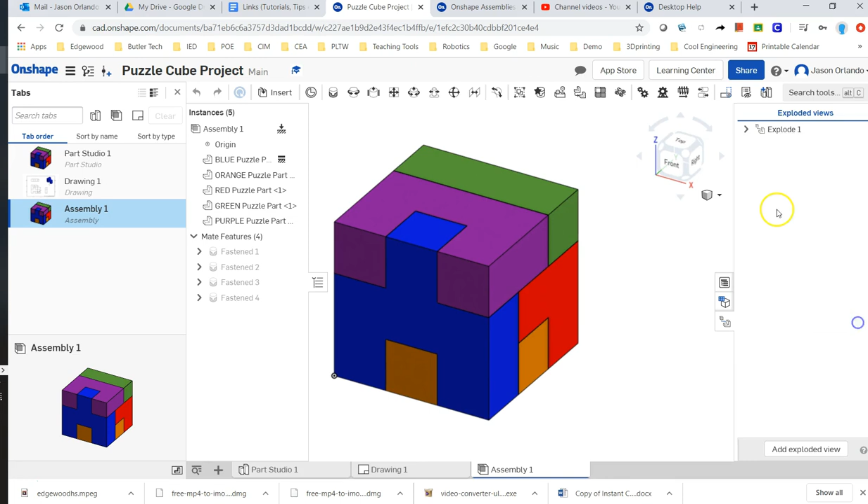Okay, in this video I'm going to show the assembly of the puzzle cube project. I'll mention the mates that are up here, how to insert, and how to get your piece grounded at the origin. We are going to look at how to create an exploded view, which is found over here. And we're going to talk about how to get into your bill of materials and update that, because this is what your parts list is going to become.

Okay, so even though I've already done that here, I'm going to flip back to my demo page and we're going to start right up. So the first thing you got to do is go to the Assembly tab down below. Instead of being in your Part Studio, go to the Assembly. If this little area doesn't show up, this little tab will expand it for you so you can see the pieces and the features you're working on. This is like your browser while you're going through the assembly to see your parts and their relationships.

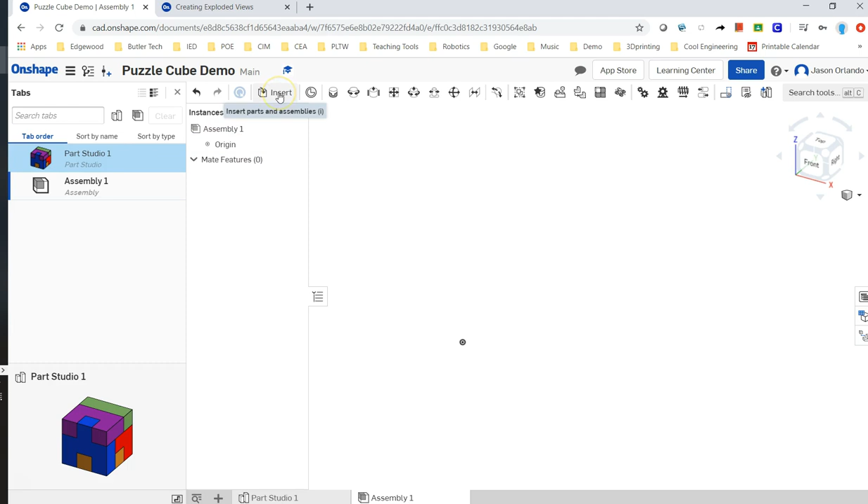So the first thing I'm going to do is insert the part that I want to be grounded. By choosing Insert, I have the option to bring in parts from my Part Studios or assemblies, and so I do have these tabs here. I can even go to other documents, but I'm going to stay within the current document and inside my Part Studio. And I'm going to bring in the blue part.

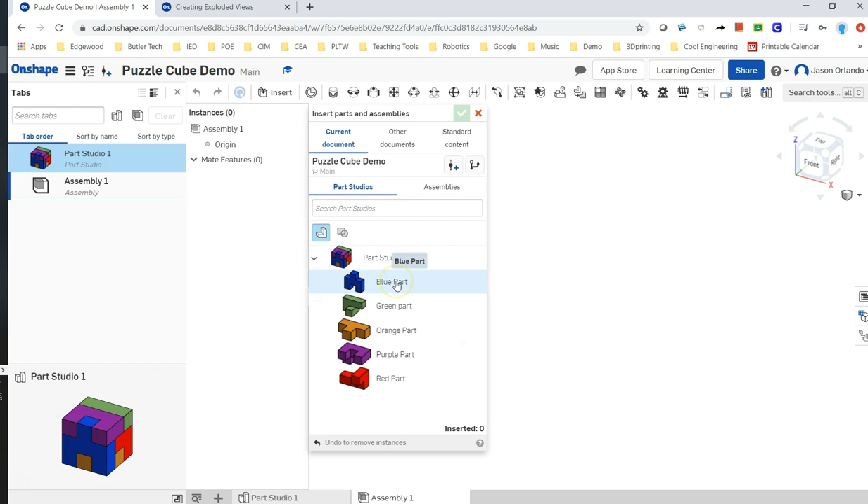So I select it here, and once I've selected it, there's a difference between left clicking in the graphic window and choosing the green check mark. For your very first piece, clicking the green check mark is ideal because it's going to come in the current orientation and it should be attached to the origin. Now it's not grounded or fixed, it can still be moved, so the best thing is to right click on it right away and then choose Fix.

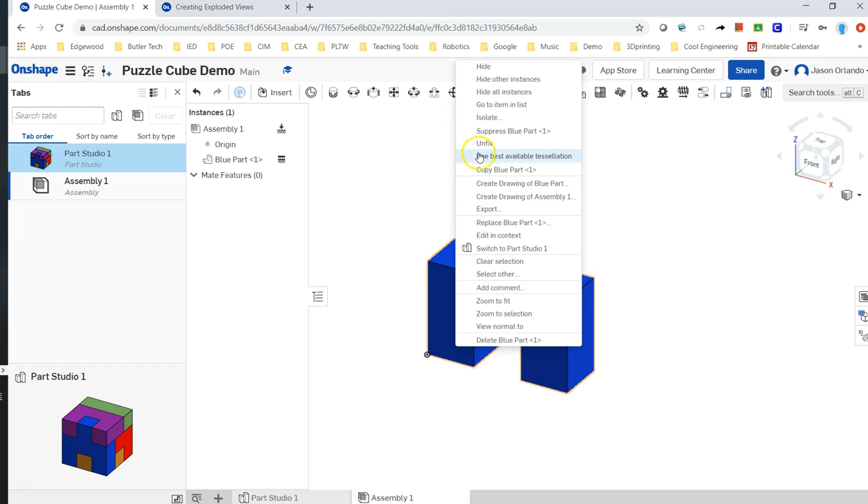So now if I try to left click and drag this object around, it is not movable in space. I'm going to right click on it though and choose Unfix, and show you briefly how to take a part that you didn't lock to the origin and how to get it there. So first, even though I can click and hold and drag, another thing you can notice is that if you just do a single left click, you'll bring up this triad where you have your three axes and you can translate the part and move it around in space. The other thing you can do is grab the center of that and latch it onto a different geometry of the part, like that corner.

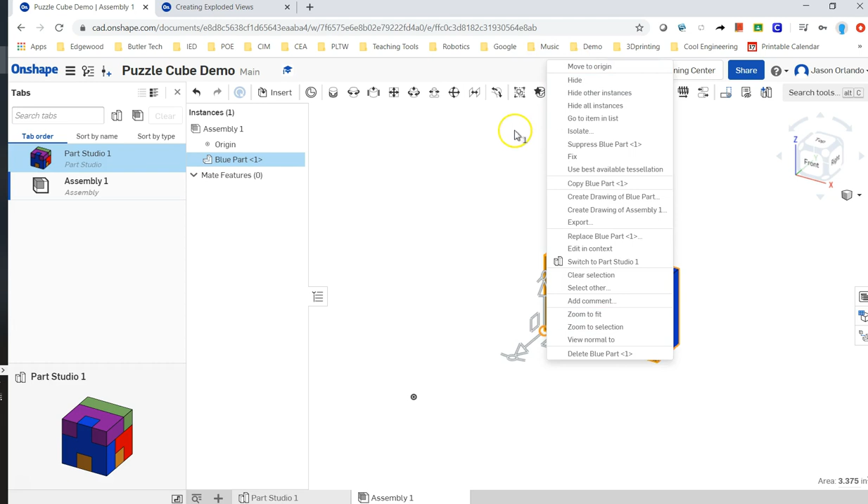Once I've done that, I can choose that center, right click on it, and move it to the origin. Now it might not be in the orientation you want though, right? So another thing, if I click on it, when these arrows show up, I can right click on an arrow and tell it to align with Z. Now Z is over here when you look at your view cube and see the orientation of your X, Y, and Z axes. This one's actually already aligned to the Z, it's pointing in the same direction as that. So if I choose that, nothing's going to happen.

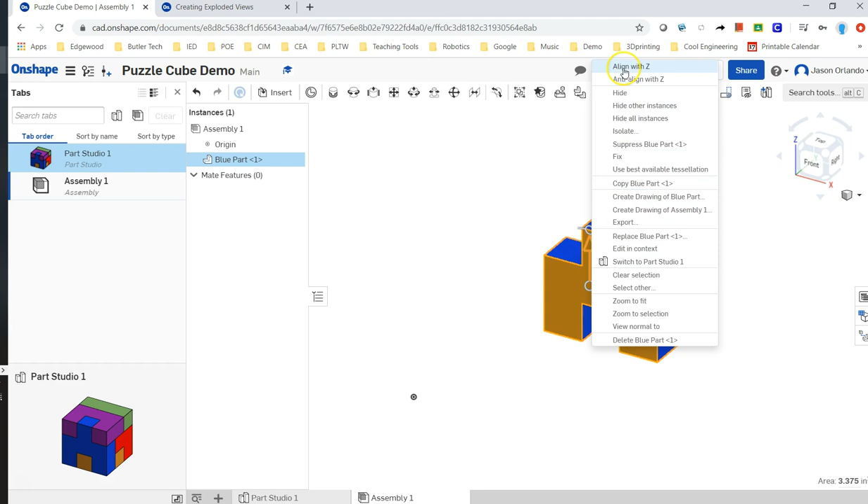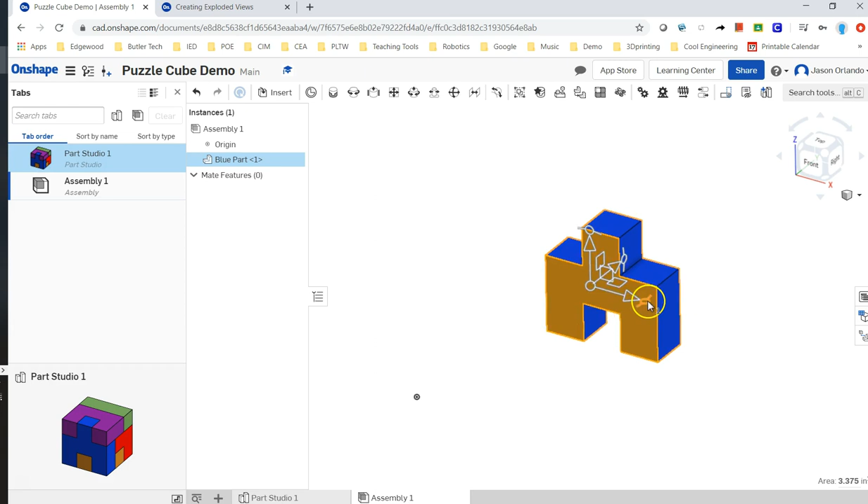Let's try it with a different one real quick though, and you'll see that the part is going to rotate around so that the axis you had selected is pointing up. So I'm going to grab the one I really wanted, which is this one, and align it with Z first. This is a way to get your orientation different. You can also grab these little symbols, and those are to control the rotational movement. So this is keeping Z in the orientation it is, but kind of rotating around that Z axis. And I'm going to keep it on 0 degrees.

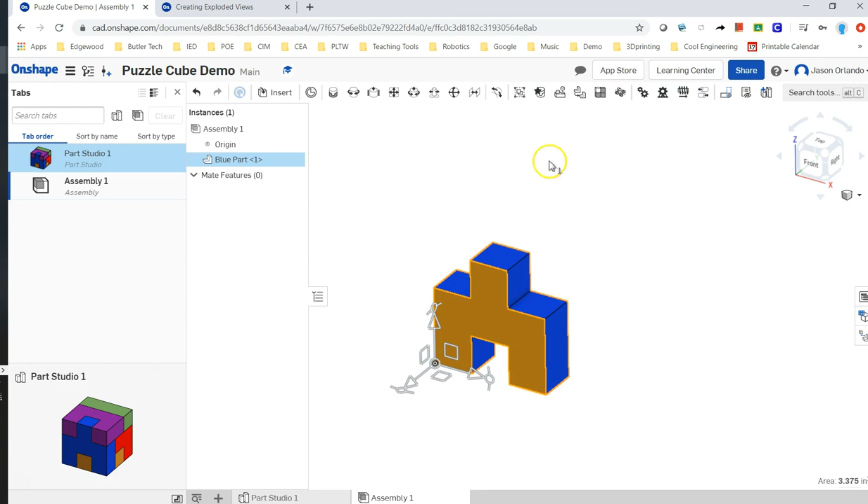Okay, so assuming you've got the orientation you want, we're going to click, move the base of that triad to the corner I want to lock to the origin, and then right click on that point and say Move to Origin. Once it's there, I can right click on the part and choose Fix. So that is the process of grounding the part to the origin if you hadn't gotten it to work the way you wanted to. Okay, next up is bringing in a second part and applying a constraint.

So I'm going to choose Insert again, and for my assembly I'm going to bring in the orange part next. If you look over here in the Part Studio, you can see the orange part, how it is kind of nested inside the blue part there. So I'm going to click on the orange part, and this time I'm just going to left click in the graphic window to place it, and then hit the green check mark to finish inserting things right now.

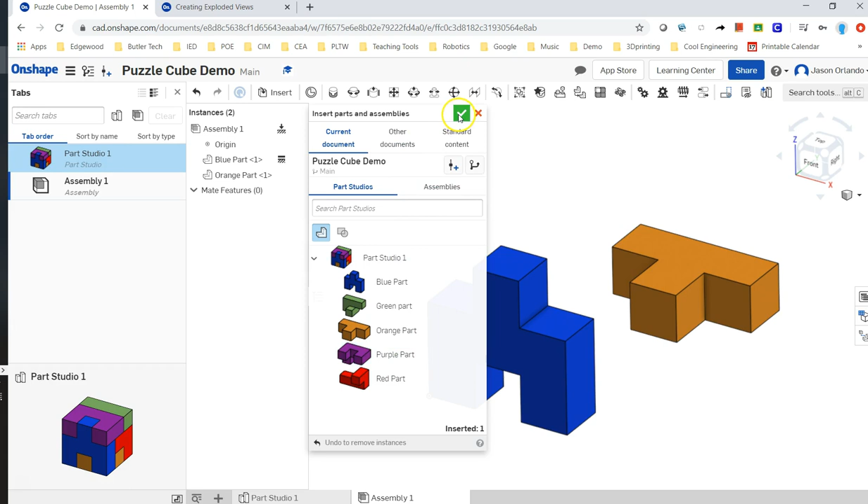So instead of bringing all the parts in, I'll just bring in this one piece for right now.

One thing that's different about Onshape than what my students using Inventor are used to is that with Inventor we had to create several mates or flushes to get our part to be fully constrained and lock down all 6 degrees of freedom. But Onshape has been created in a way that, as they put it, you should not have to use more than one mate. They say if you're using more than one mate, you need to stop and reevaluate what you're doing, because there probably was a better way.

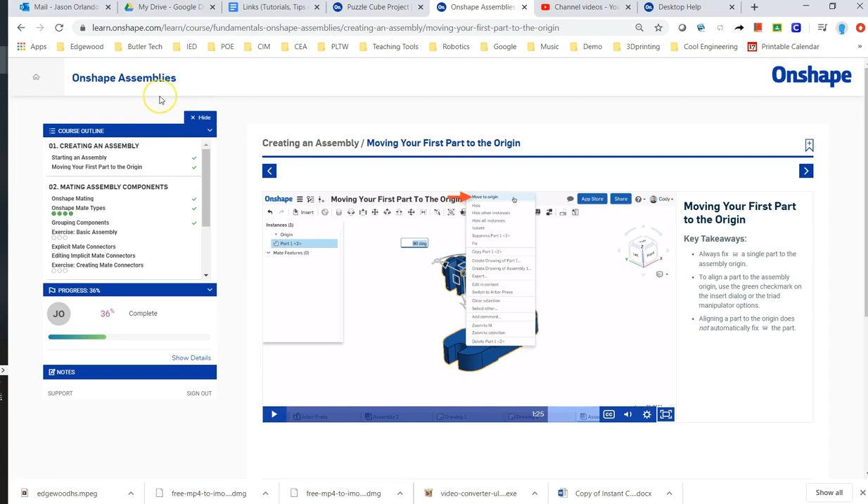It will direct you—because I'm not going to go over all of these things—to the Onshape learning course called Onshape Assemblies, which is inside the CAD Fundamentals course as a sub-course. There you'll learn about mating assembly components and all the different mate types. I'm not going to spend the time to go through all of these, but I wanted to note that you're not supposed to have to use any one of them more than one time. So learn about those and figure them out.

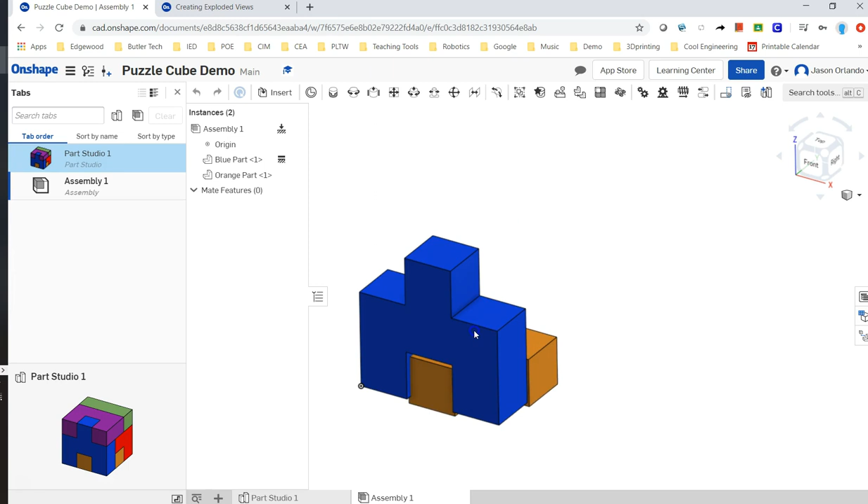For us, I can tell you that we want this piece to come in here and be fixed. We don't want it to be able to move at all once it's in place. It's not an assembly where something's still supposed to rotate or slide. So the very first one is called a fastened mate, and that will do the job for us.

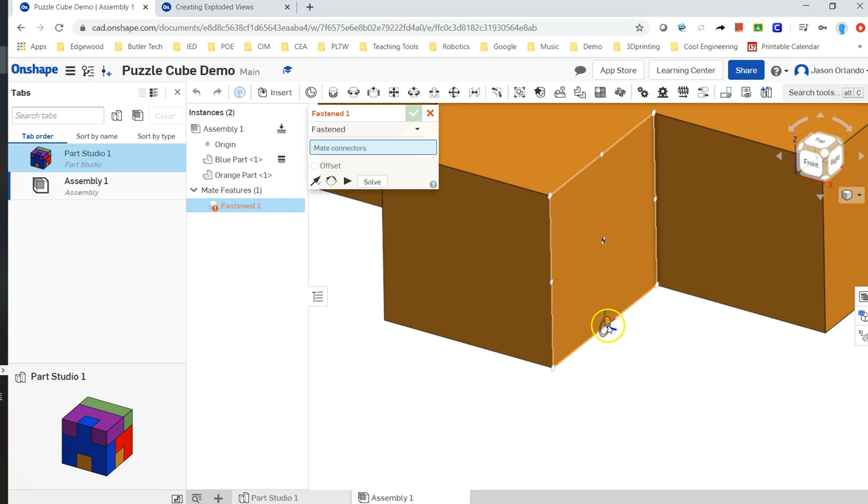How we use a lot of these tools is that as you hover over parts, you're going to see a little connector. That's giving you more than one thing—one is obviously a point in space, so we're going to connect a point on the orange part with a point on the blue part. But we also have to feed the orientation. You'll notice the symbol also has a disc, which is a flat shape—think of that as referencing a plane. We want to be mindful of the direction of that disc on both parts, because they are going to become coplanar.

I really want this face right here to be flushed with this face, so this face and this face are going to become coplanar. But for the geometry to align it, I'm going to use this corner right here and that corner—those corners should be touching.

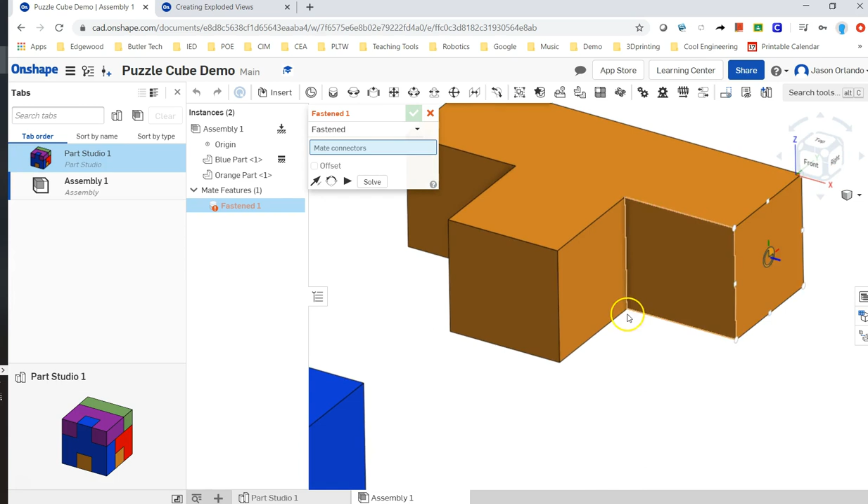When I grab that corner, I have to be mindful of what direction that disc is facing. Right here, that disc is normal to, if you're paying attention to my view cube, the x-axis. Over here, the way I just went to that vertex, it's actually normal to the y-axis. I want them both pointed in the same orientation as the part should come to rest, so I'm going to hover more in the middle of the face to get that disc normal to the axis I want, the y.

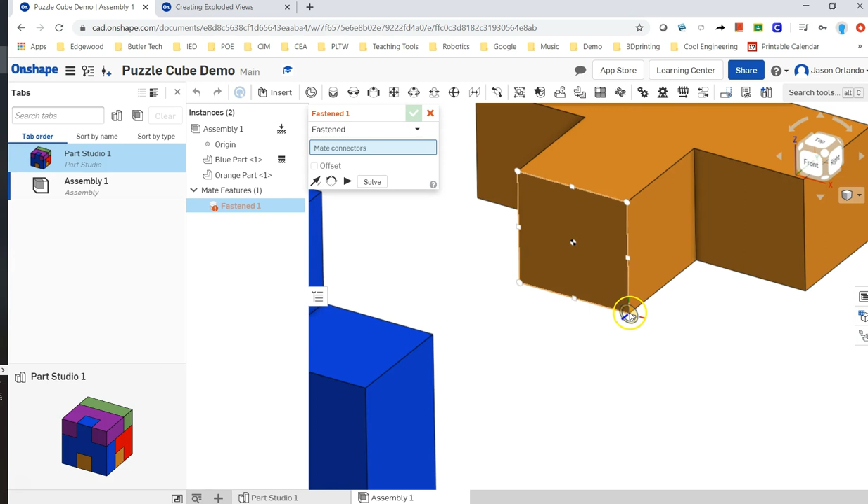Then I'll move to the correct corner and select it—you know you selected it when the whole shape highlights. Then I'm going to move to the blue part, again go to the face to get the disc normal to the axis you want, then move to the vertex. Click again, and it should create that mate. I'm going to choose the green check mark to accept it.

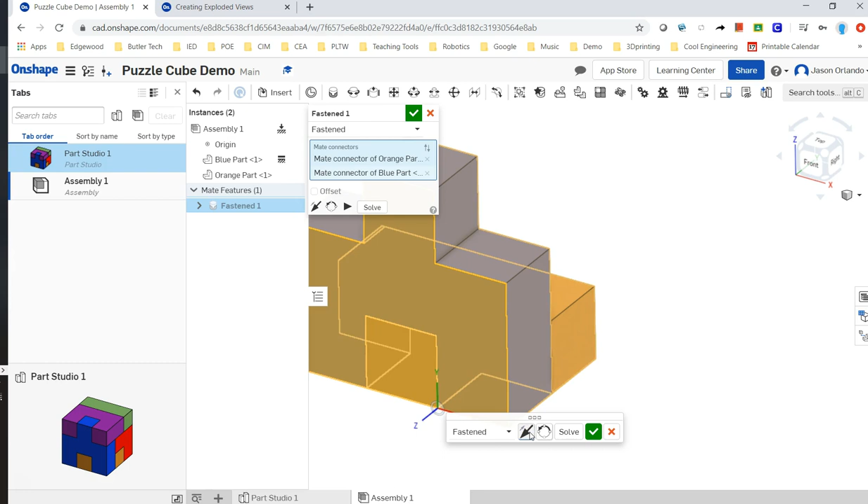Before you do that, though, inside this menu you can choose different orientations. While those points stay connected, you could look at rotating it if it didn't go into the orientation you want, or you can also choose flipping it. We haven't contradicted my selections yet—these are just other options within my selections. Mine are coming in just the way I wanted because of how I modeled in my Part Studio.

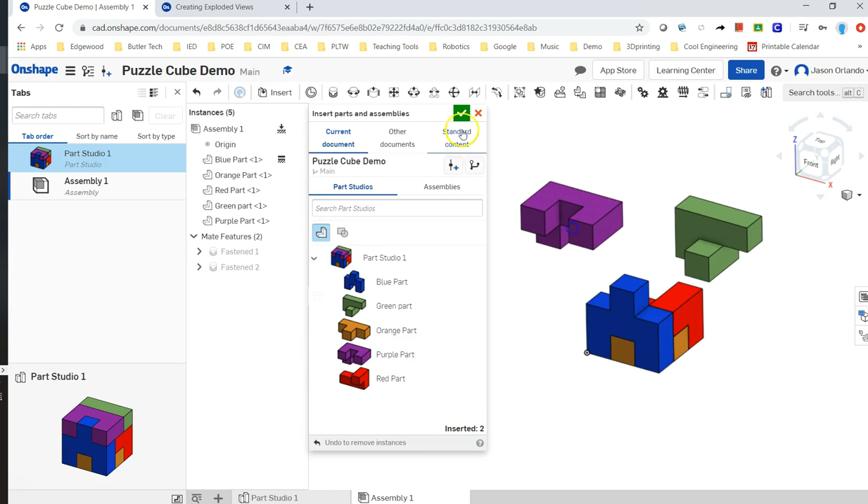From here, I'll speed the video up, but I'm going to go ahead and finish my assembly. So there we have it—I have my completed puzzle cube in terms of the assembly.

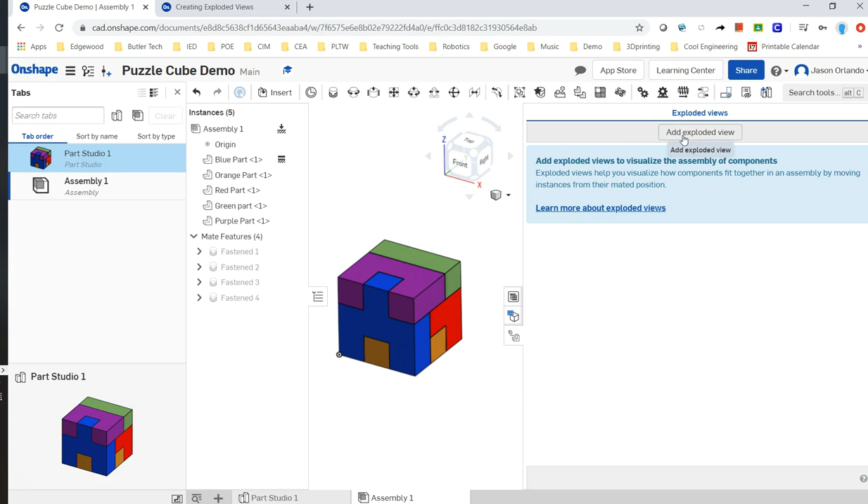Next, let's look at how to do the exploded view. Over on the right side of your screen, you have this little handle with 3 tabs. If you click any one of those, a menu expands out here. The bottom one is used to create exploded views. You can actually create more than one, but we're just going to create one. I'm going to choose Add Exploded View, this button at the top, to begin creating an exploded view.

I'm going to have a little browser here that shows me what I've done. It says build steps by dragging components—select components in the graphics area or the instance list over here, then drag or rotate them using the triad manipulator.

So I can grab this edge and make that a little smaller so I have more room to work with, and change my zoom level to help me out.

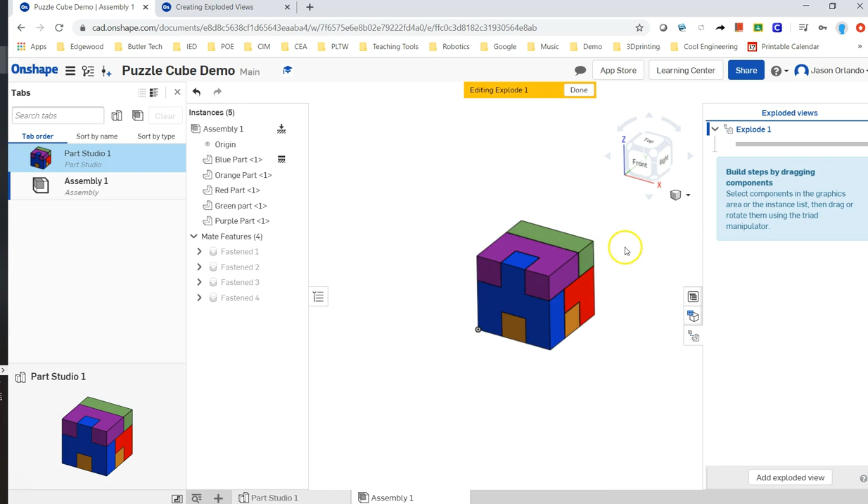You'll notice that up above here I have a message that lets me know I am editing Explode 1, and so I'm going to begin to pull my shape apart, one piece at a time.

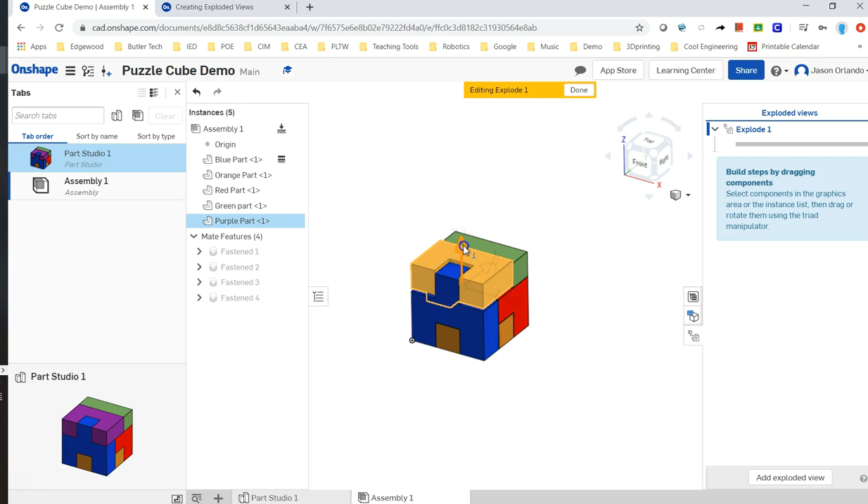So I think I will grab the purple piece and bring it straight up. I select it, and then I use the triad manipulator, and I just pull that straight up. And I like to make sure that the parts are not kind of upstaging or overlapping each other in this isometric view that I'm going to use.

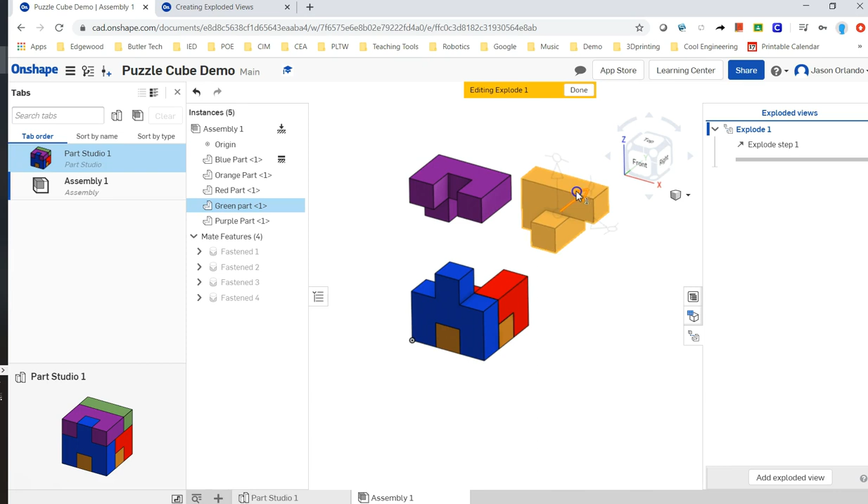So I'm going to accept that, and then I'm going to choose another part. Again, I'm always trying to make sure that I extend or move these parts in a direction that they don't pass through each other in space, so they don't look like ghosts.

Okay, so that's it. I just created an exploded view. I am done editing it, so I can just press done. When I do that, it's going to go back to the assembly, and that's okay.

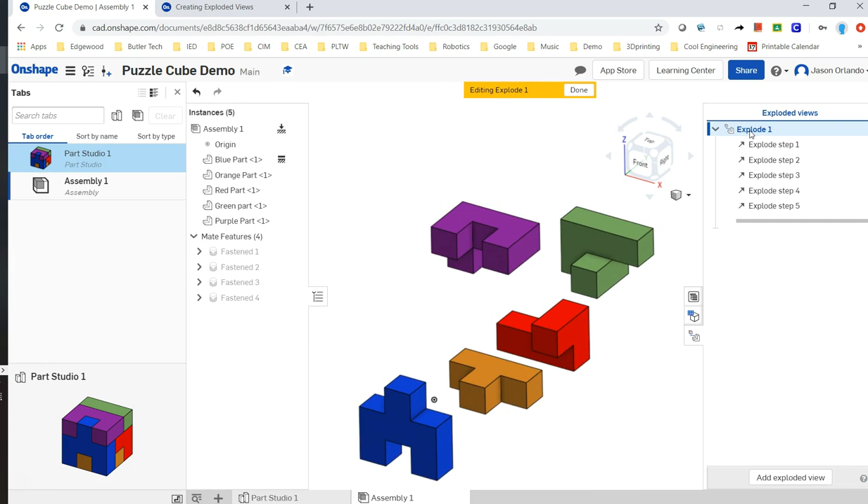How do I get to see my exploded view? I just come over here. If this was closed, I'll press the button, and then I can double click on the name of the explosion that I want to see. And there it is. I can double click on it again, it'll close, and I can close this window.

So there are 3 tabs. To close this, you have to press the one that you're currently on. If you press a different one, then you're actually going to move to that panel.

So let's go ahead and go into the BOM, which stands for Bill of Materials. My Inventor students are used to creating what we call a parts list. In the menu in Inventor, it's called Parts List. Here, this is a Bill of Materials. It's basically the same thing.

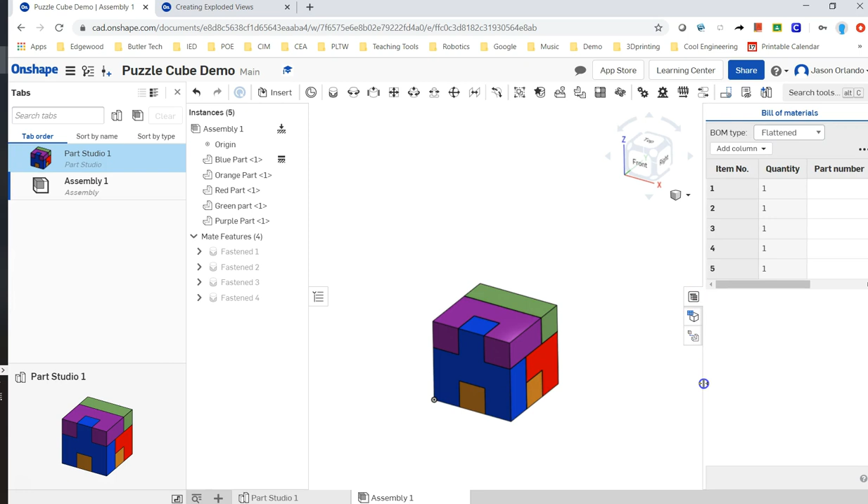So when we get to the drawing sheet, we want to be able to bring that parts list or bill of materials onto our drawing page. This is where we're going to define what's part of it. So we're going to do it right here. First off, I can see that I've got several columns that are already here, and this is editable.

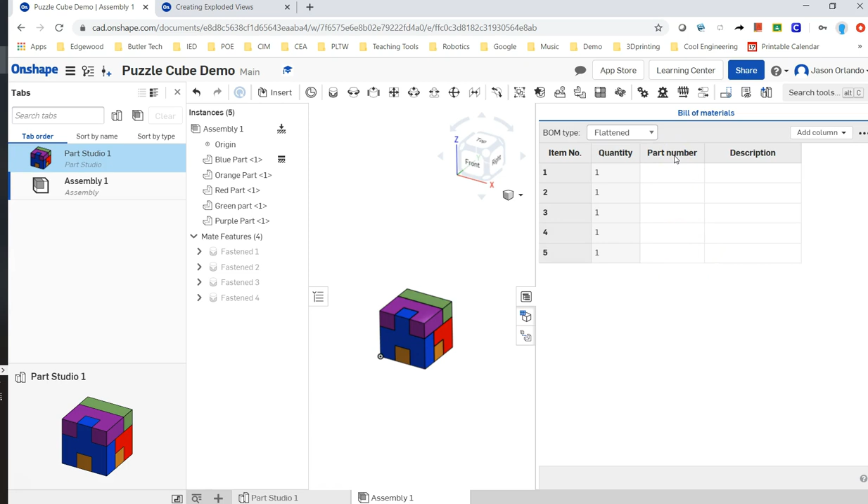I'm not going to use the part number, so I'll right click on that. Right clicking on this column header gives me options to move it right or left, and also to remove the whole column, so I'm going to remove it. And description, I'm actually going to leave. We'll throw something in there.

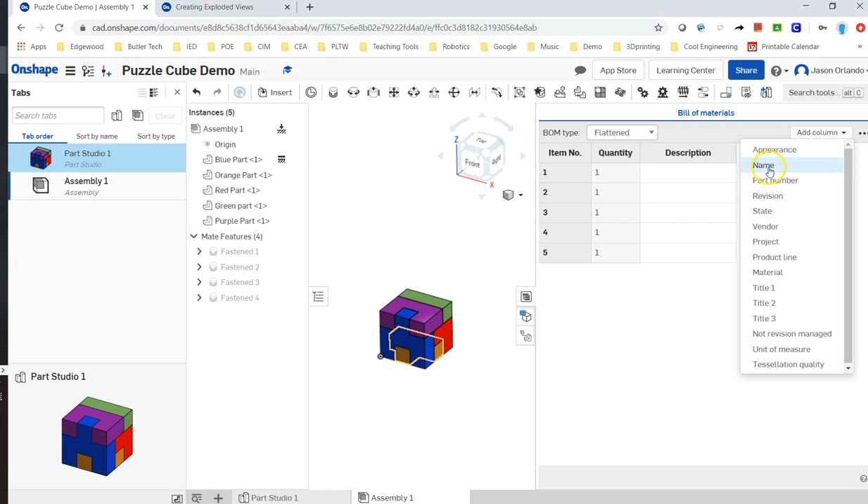But if I want to add something, like say the file names, I've already given all these parts names, blue part, orange part, etc. If you click this little drop down, you have all these other things that can become part of your bill of materials. And name is actually your file names right here, kind of part names. So I'm going to choose name, because that's already been something that I've created.

And I don't want it to be on the end, so I'm going to right click and move it to the left, so I'll have my order this way. This will be the item number. This is going to be what's going to be in my balloon. And then it shows quantity, how many of those parts we have, and the name.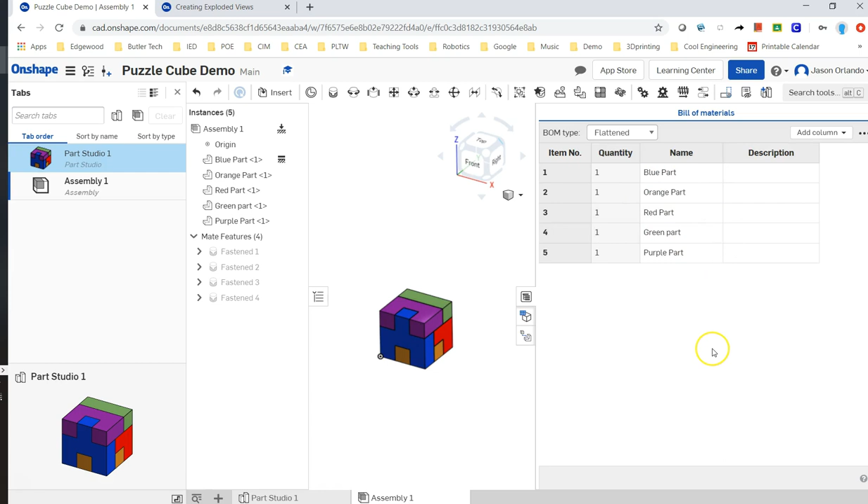All right, description. When we do the Puzzle Cube project, we had a constraint that said you had to have so many parts created with X number of cubes, right? So let's go ahead and just use the description box to acknowledge how many of those linking cubes it took to build each part.

So I can see the blue shape right here. It was 1, 2, 3, 4, 5, 6. And I basically just come over here, and I think I have to double click, but nope, I just single clicked, so I can say 6 linking cubes, or 6 blocks, or whatever you want to call it. And I can go through here and update all of those.

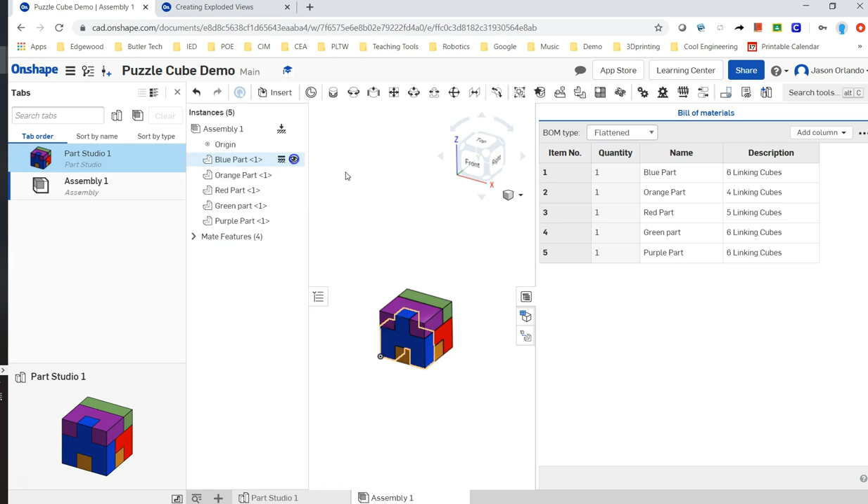Okay, so there you go. Now you have it. We have completed our assembly, we've created an exploded view, and we have updated our bill of materials. So in the next video, we will show you how to start putting these things onto a drawing sheet: the assembled view, the exploded view, multi-view drawings of each individual part, and how to add that bill of materials in and add balloons to connect everything. All right, hope this is helping you guys out.